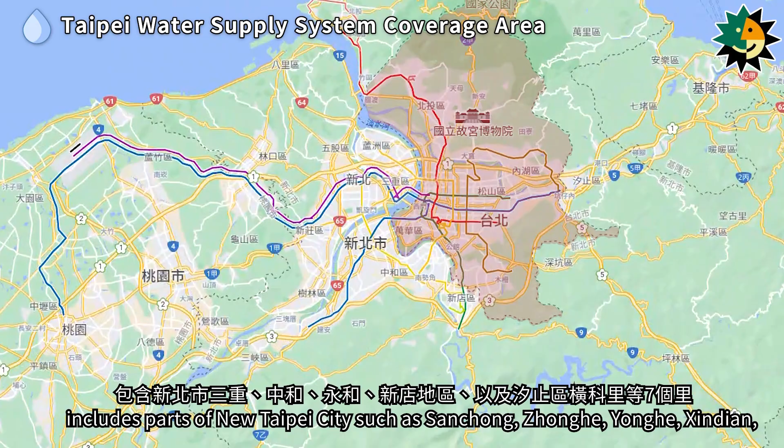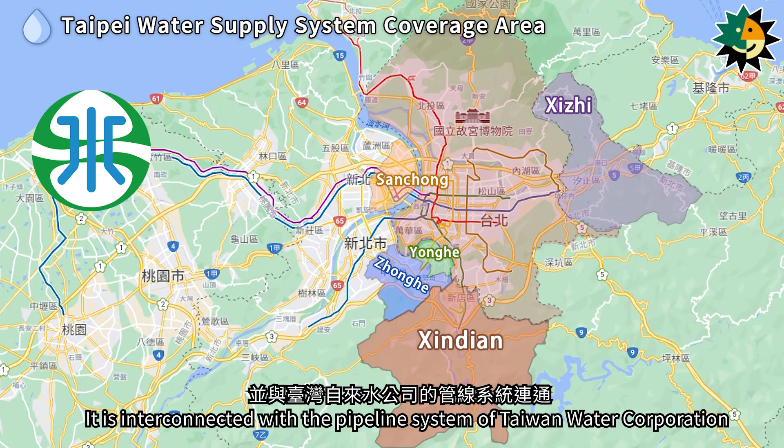The Taipei water supply system, centered around Taipei City, includes parts of New Taipei City such as Sanchong, Zhonghe, Yonghe, Xindian, as well as Hengke Village in Xizhi District and 7 other villages. It is interconnected with the pipeline system of Taiwan Water Corporation and regularly supports areas like Banqiao, Luzhou, Xinzhuang, Tamsui, Sanzhi, Xizhi, and Shenkeng in New Taipei City.

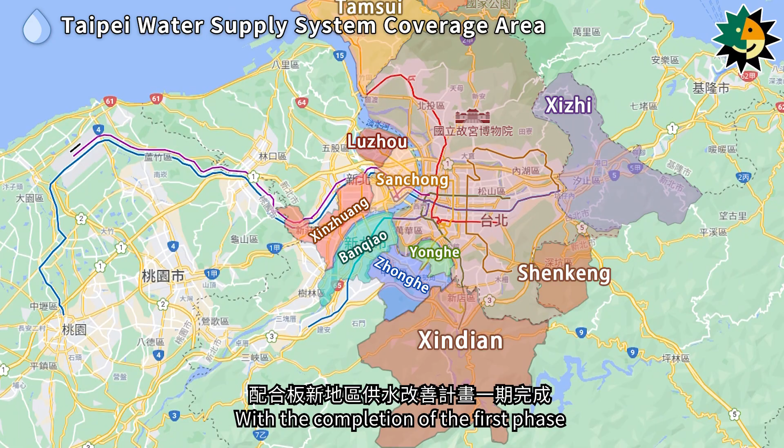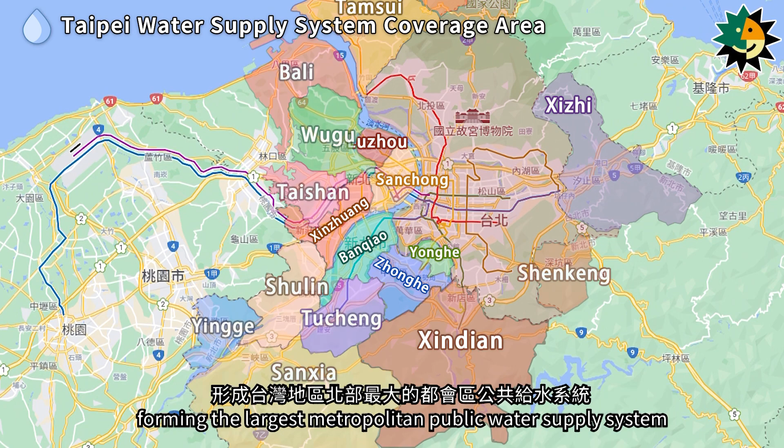With the completion of the first phase of the Banxin Area Water Supply Improvement Project, it further supports Bali, Wugu, Taishan, and parts of Tucheng. The second phase will expand support to Shulin, Yingge, Sanxia, and Tucheng in the Banxin area, forming the largest metropolitan public water supply system in northern Taiwan. The water distribution network spans over 3,000 kilometers.

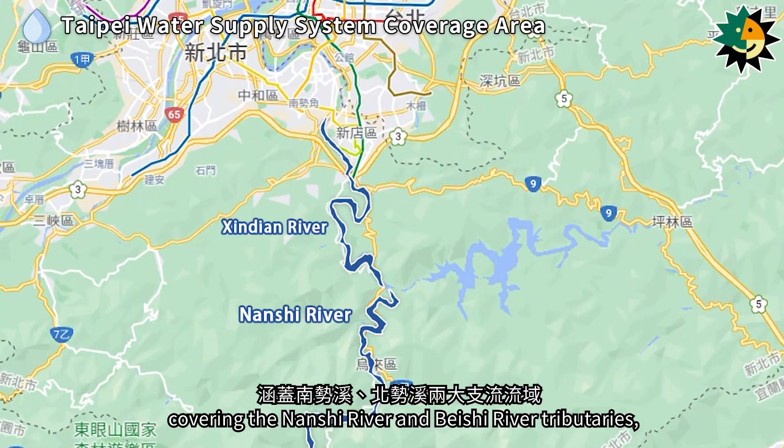The Xindian River is the main headwater for the Taipei metropolitan area, covering the Nanshi River and Beishi River tributaries, with catchment areas in Shiding, Xindian, Pinglin, Wulai, and Shuangxi, providing over 97% of the water for the Taipei metropolitan area.

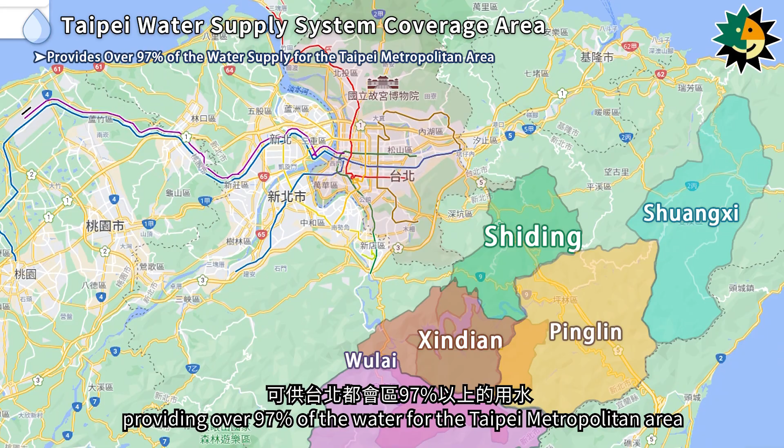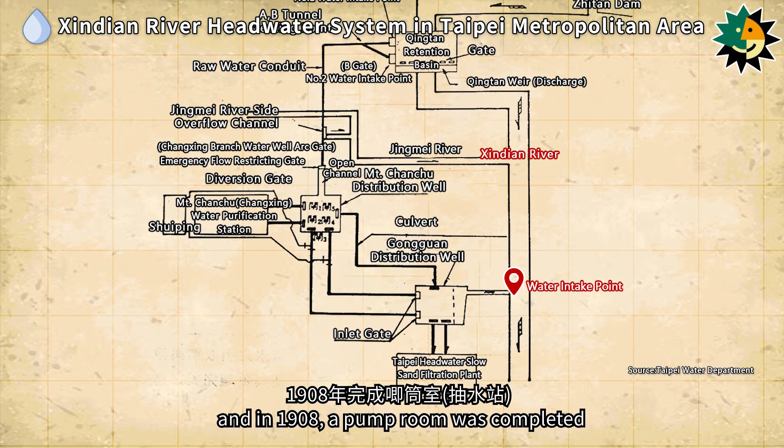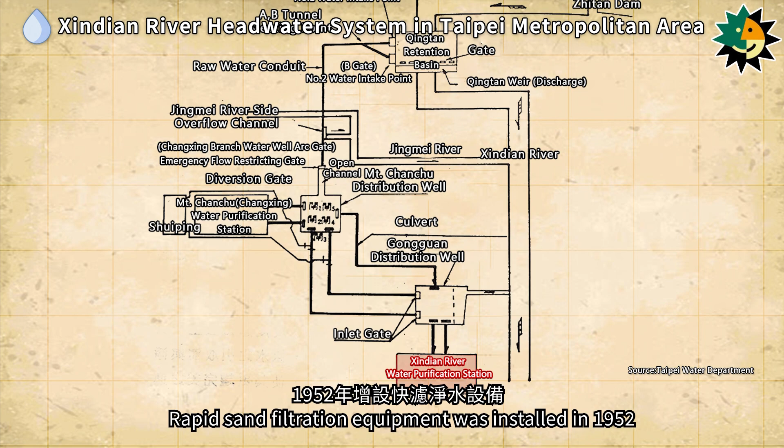In 1907, a water intake point was established at the lower reaches of the Xindian River, and in 1908, a pump room was completed to supply the Taipei Headwater slow sand filtration plant. In 1946, a second intake point near the original Xindian River intake point was established, and 2 additional pumps were added in 1949. Rapid sand filtration equipment was installed in 1952. Water from both intake points at the Xindian River is directed to the Gongguan Water Distribution Well.

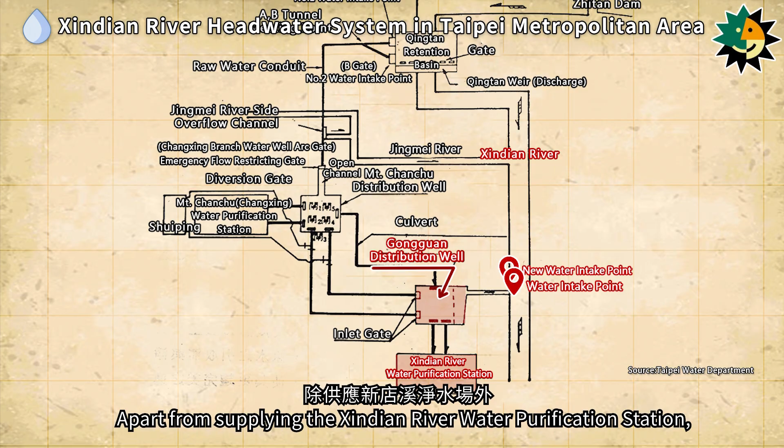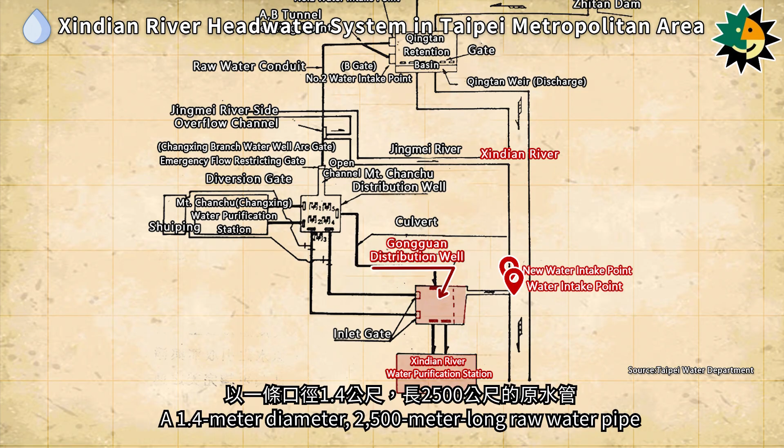Apart from supplying the Xindian River Water Purification Station, it also supports the first phase of the Taipei Water Supply Expansion Plan, which began in 1962 and was completed in 1965. A 1.4-meter diameter, 2,500-meter long raw water pipe was constructed to deliver water to the Chanchu Mountain Water Distribution Well, providing water to the newly established Chanchu Mountain Water Purification Station to meet the planned water supply for 1.18 million people in 1965.

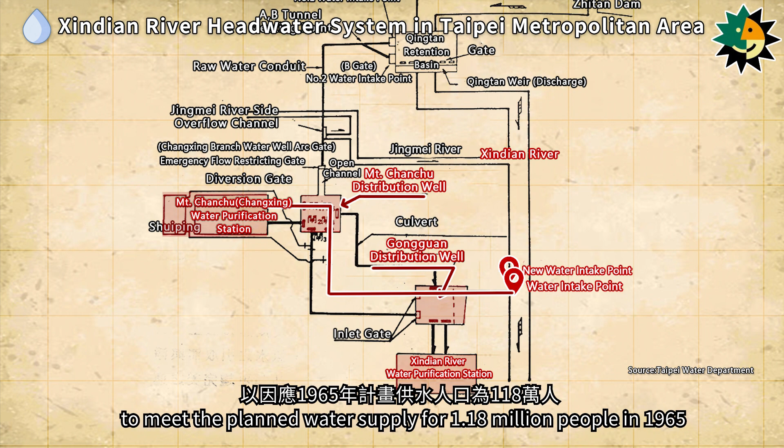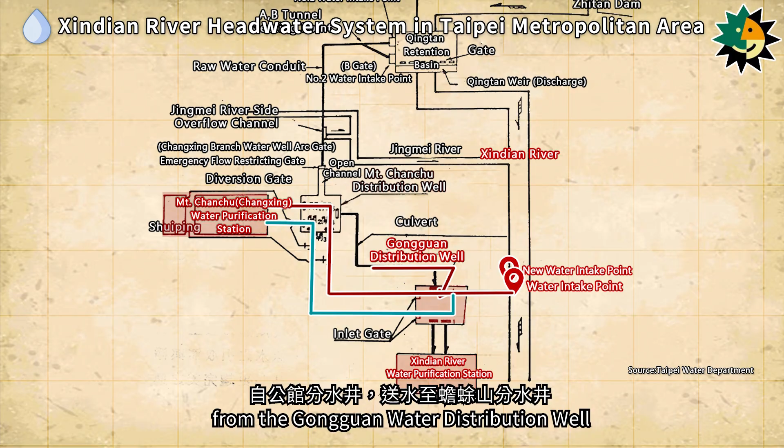In 1971, to support the second phase of the Taipei Water Supply Expansion Plan, another 1.4-meter diameter raw water supply channel was added from the Gongguan Water Distribution Well to the Chanchu Mountain Water Distribution Well, increasing the headwater for the Chanchu Mountain Water Purification Station.

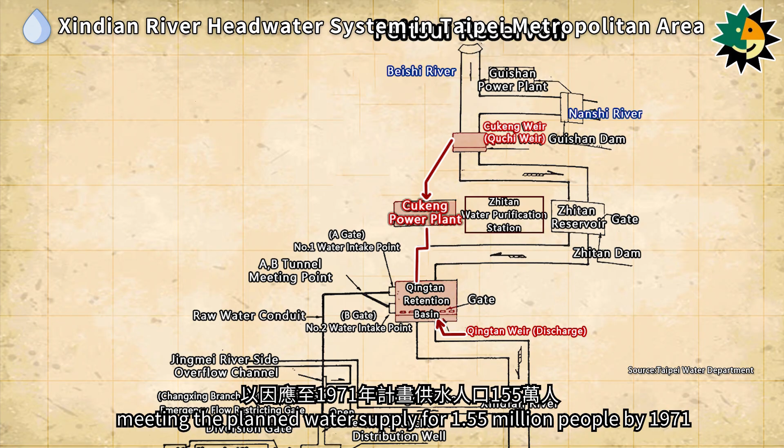Additionally, in 1965, Taiwan Power Company added 2 vertical rising sluice gates at the Quchi weir to divert water for the Cukeng hydropower plant. The tailwater from peak power generation was also used to supply the Qingtan Weir for the water purification station, meeting the planned water supply for 1.55 million people by 1971.

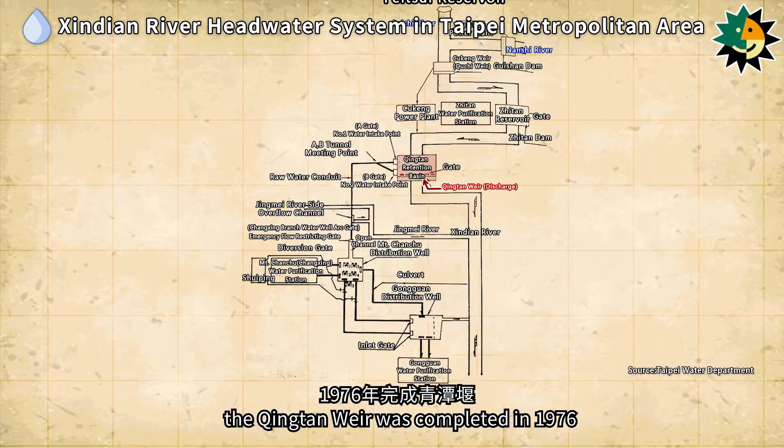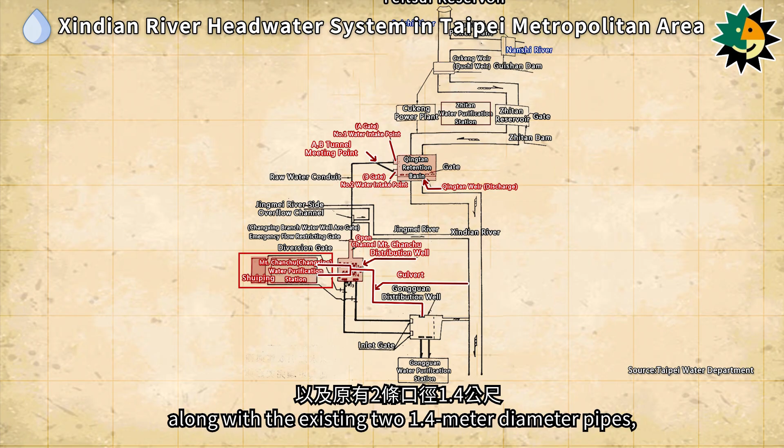In coordination with the third phase of the Taipei Water Supply Expansion Plan, the Qingtan Weir was completed in 1976. It features 2 water intake points and utilizes a 3.2-meter diameter tunnel and open channel, stretching 8.9 kilometers, to channel water into the Chanchu Mountain Water Distribution Well, supplying the Changxing Water Purification Station. Additionally, a new 2-meter diameter culvert and tunnel, 2.07 kilometers long, were added, along with the existing 2 1.4-meter diameter pipes, to transport water to the Gongguan Water Distribution Well, serving the newly constructed Gongguan Water Purification Station.

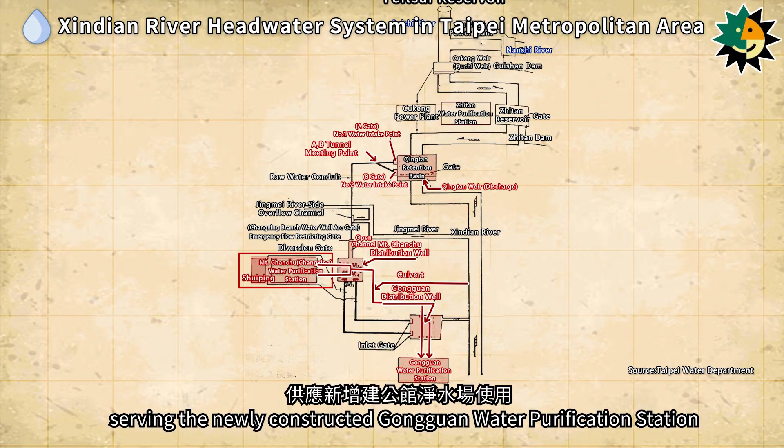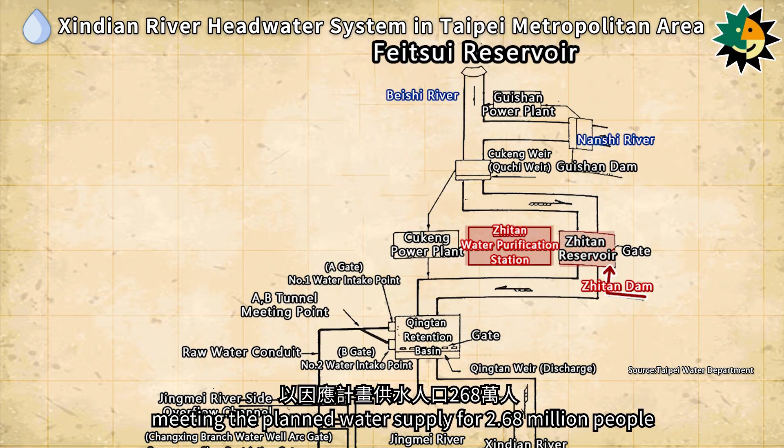In 1978, the Zhitan Dam was completed to supply raw water to the Zhitan Water Purification Station, meeting the planned water supply for 2.68 million people. In coordination with the first stage of the fourth phase of the Taipei Water Supply Expansion Plan, the third water purification facility at the Changxing Water Purification Station was built in 1972.

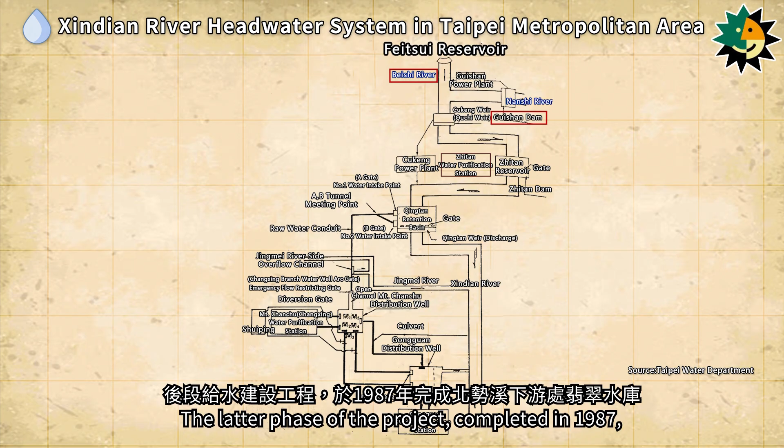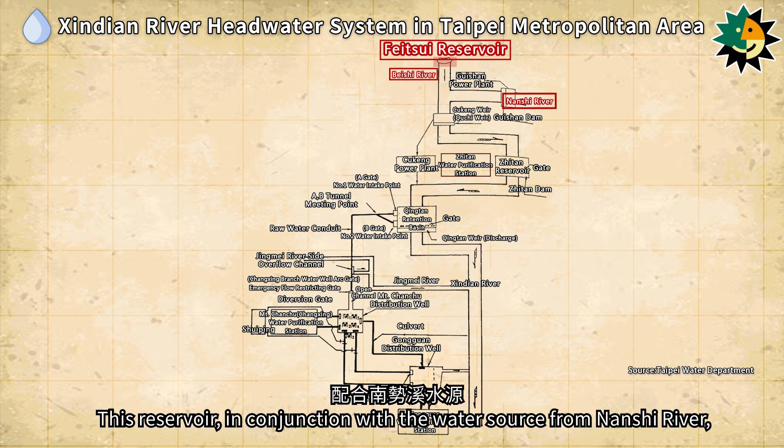The latter phase of the project, completed in 1987, saw the construction of the Feitsui Reservoir downstream of Beishi River. This reservoir, in conjunction with the water source from Nanshi River, was utilized to regulate and supply water to the Gongguan, Changxing, and Zhitan water purification stations.

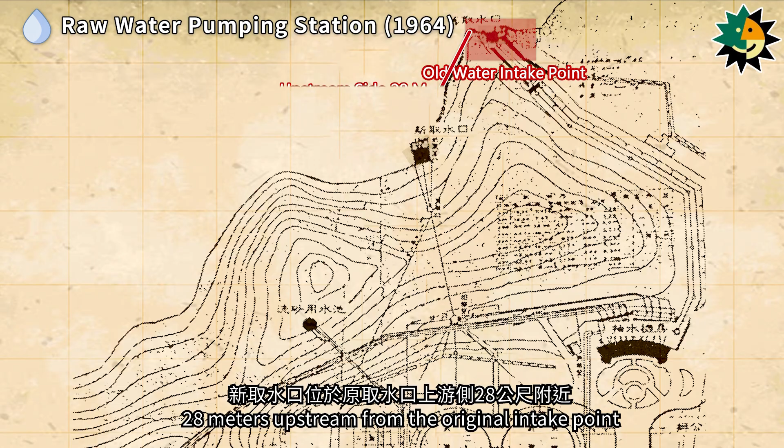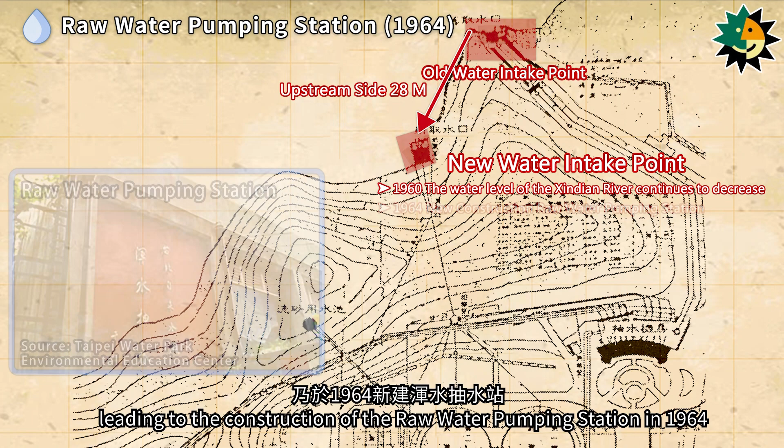Due to the decreasing water level of the Xindian River, a new water intake point was established in 1946, 28 meters upstream from the original intake point at the lower reaches of the river. By the early 1960s, this new water intake point became less effective as the river level continued to drop, leading to the construction of the raw water pumping station in 1964. Additional water pumps were gradually added to meet the water supply needs.

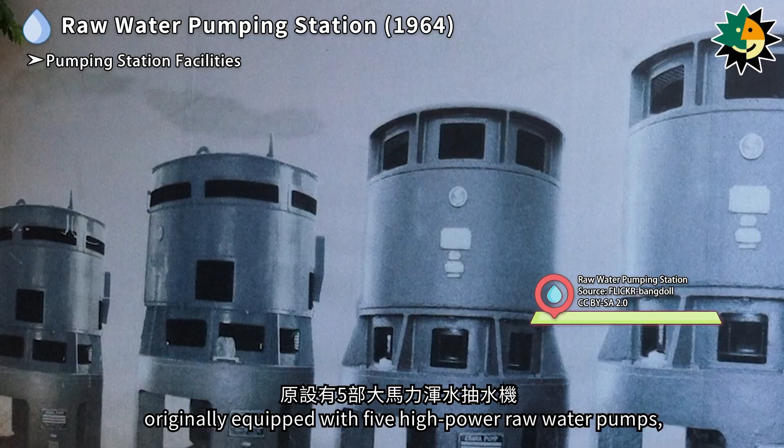The raw water pumping station is constructed of reinforced concrete, with a caisson foundation infrastructure design. The building is divided into 2 levels. The upper level houses the pump room, originally equipped with 5 high-power raw water pumps, and later 11 smaller horsepower motors were added. The lower level is the water pipe room, with a side room for the electrical distribution control panel room. After its retirement in 1976, the station was listed as a historic building and is currently being renovated to become a riverside scenic restaurant.

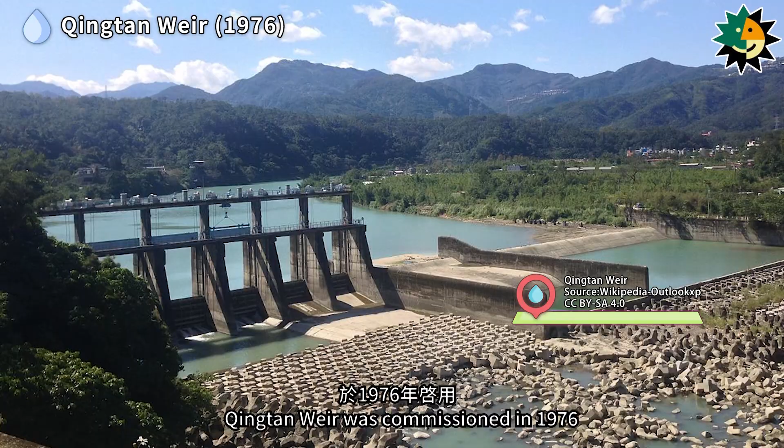Located on the Xindian River at Xiaochukeng, upstream of the Chuking Power Plant and downstream of the Bitan Scenic Area, Qingtan Weir was commissioned in 1976. It is a gate-controlled floating concrete weir. The gate section of the weir is 69.6 meters long, divided into 6 openings by 6 1.6-meter thick bridge piers, each opening being 10 meters wide. The non-gate section is 128 meters long, making the total length of the weir 197.6 meters.

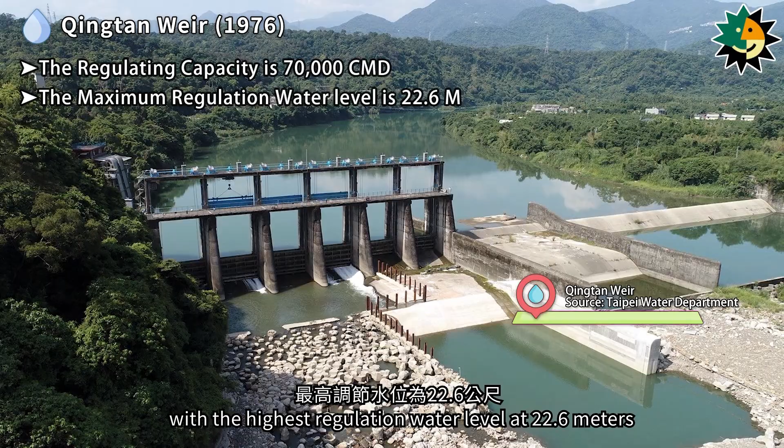It has an effective regulation capacity of 70,000 cubic meters, with the highest regulation water level at 22.6 meters. The Qingtan Weir is equipped with a water intake point, with a daily capacity of 1.08 million cubic meters, and a raw water diversion pipe that is 11,119 meters long.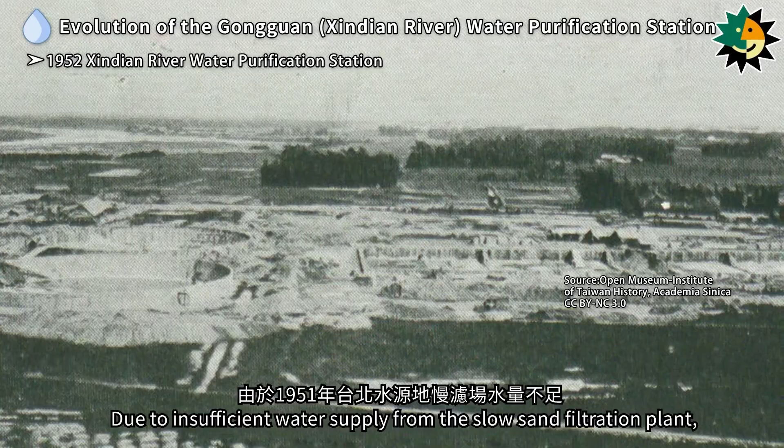The Taipei Headwater Point Slow Sand Filtration Plant was completed in 1909. Due to insufficient water supply from the slow sand filtration plant, a rapid sand filtration plant was constructed adjacent to it in 1951 and completed in 1952. It was renamed the Xindian River Water Purification Station.

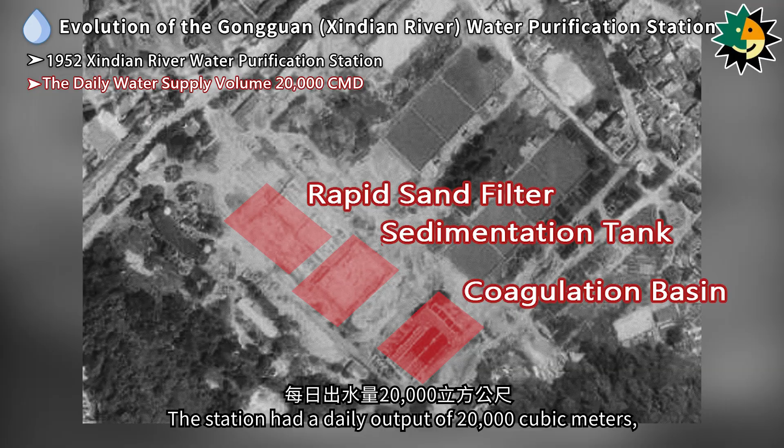A new water intake point was also established near the original intake point at the lower reaches of the Xindian River, with water being directed to the purification station through a pump room. The added facilities included 1 coagulation basin, 2 sedimentation tanks, and 4 rapid sand filters. The station had a daily output of 20,000 cubic meters, supplying domestic water to the Taipei City Walls area.

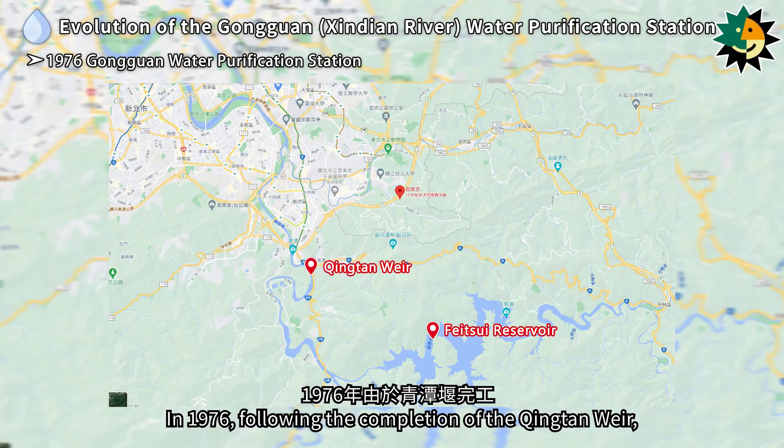In 1974, the slow sand filtration plant was decommissioned and demolished, and the site was rebuilt as the Gongguan Water Purification Station, which utilizes rapid sand filtration for water purification. In 1976, following the completion of the Qingtan Weir, the Gongguan Water Purification Station added a rapid sand filtration facility with a daily distribution capacity of 480,000 cubic meters.

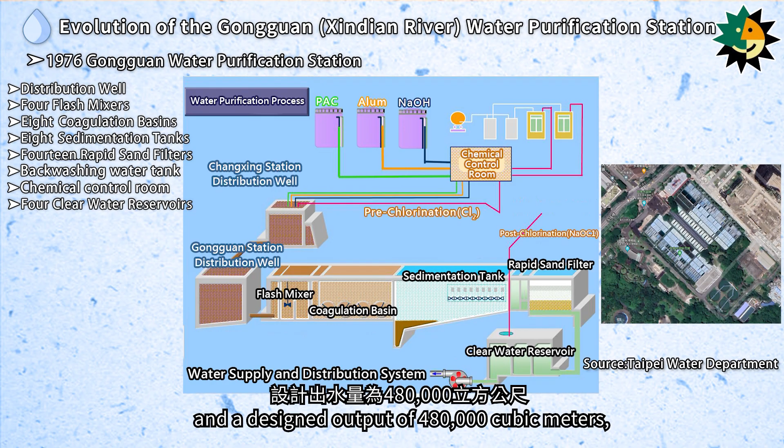The Gongguan Water Purification Station's facilities include a distribution well, 4 flash mixers, 8 coagulation basins, 8 sedimentation tanks, 14 rapid sand filters, a backwashing water tank, a chemical control room, and 4 clear water reservoirs. The station has a daily raw water purification capacity of 520,000 cubic meters and a designed output of 480,000 cubic meters, supplying domestic water to Zhongzheng, Wanhua, and Wenshan districts of Taipei City.

By 1958, Taipei's population had exceeded 800,000, and the water supply was only about half of the normal demand. Considering the limited water quantity and distribution distance of the water supply system, the Water Supply Construction Committee was established to plan long-term water supply projects. The first step was to plan a new Chanchu Mountain Water Purification Station at Changxing Street at the foot of Chanchu Mountain.

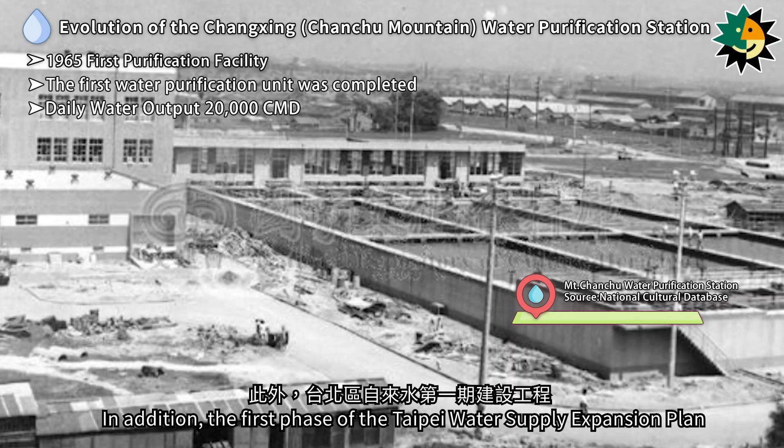In addition, the first phase of the Taipei Water Supply Expansion Plan includes the construction of 3 deep wells, 3 large elevated distribution reservoirs, and the installation of over 300 kilometers of new water supply and distribution pipelines, extending the supply area to include Sanchong, Shilin, Yonghe, Zhonghe, Jingmei, Xindian, and Muza.

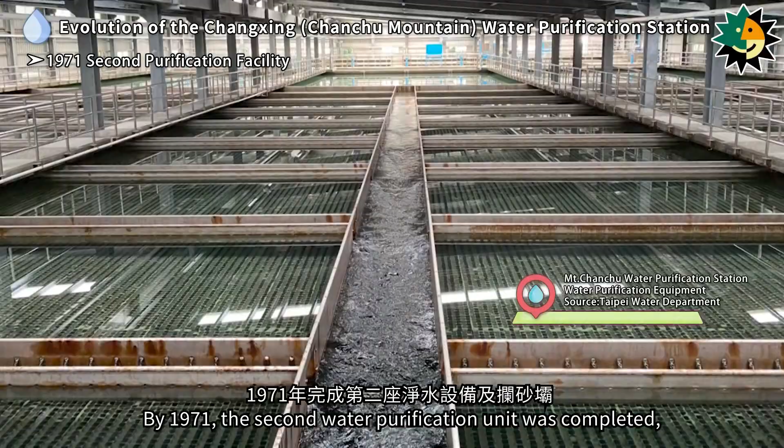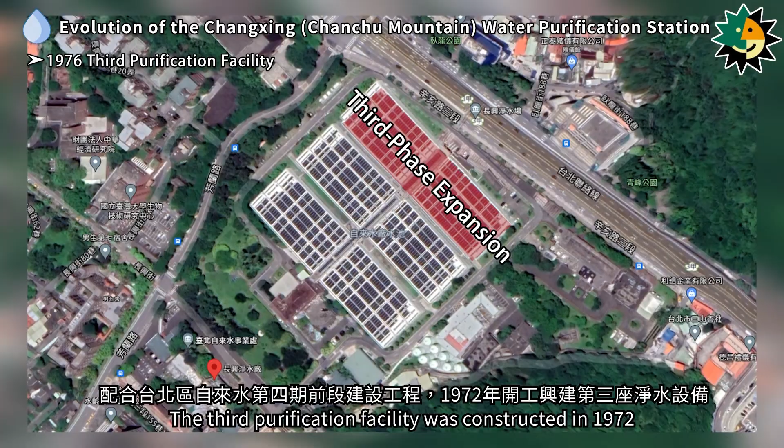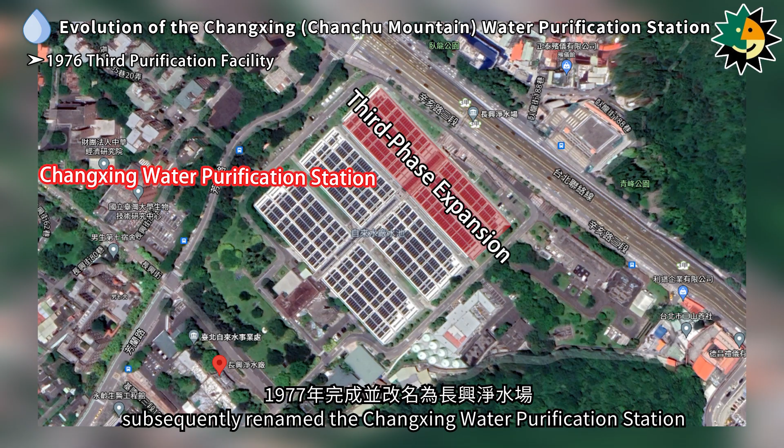The third purification facility was constructed in 1972 as part of the first stage of the fourth phase of the Taipei Water Supply Expansion Plan and was completed in 1977, subsequently renamed the Changxing Water Purification Station. The facility includes 6 coagulation basins, 18 sedimentation tanks, 9 rapid sand filters for clear water reservoirs, and 2 flash mixers.

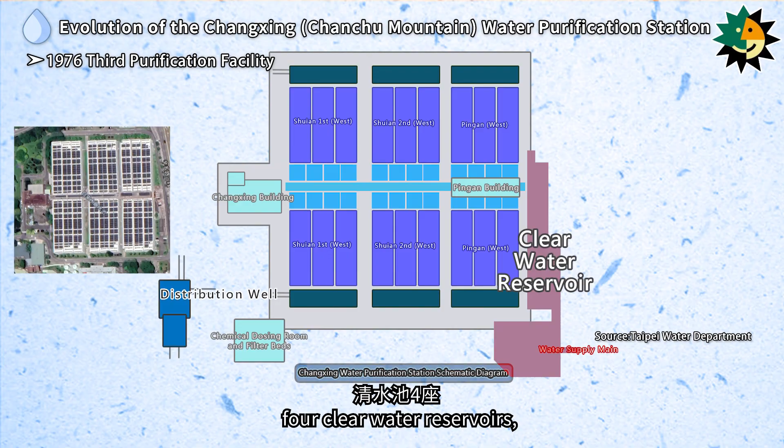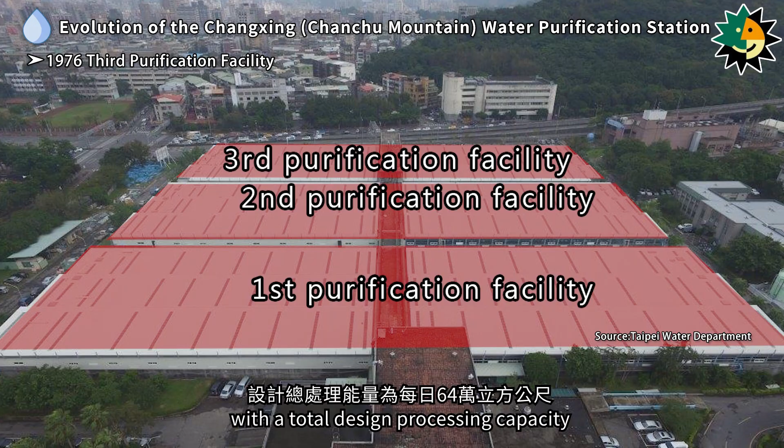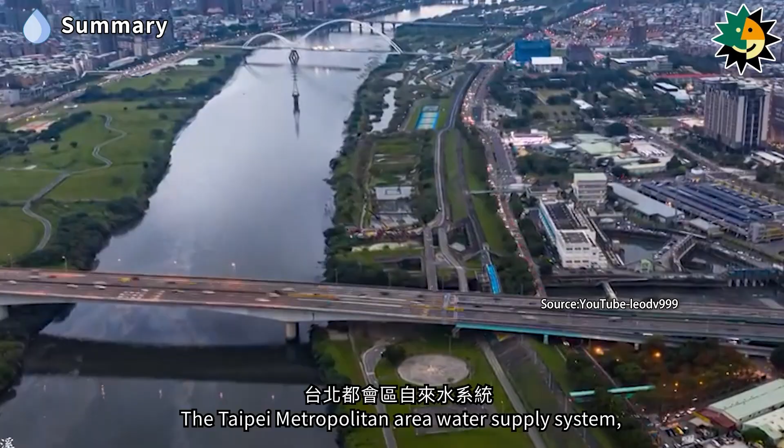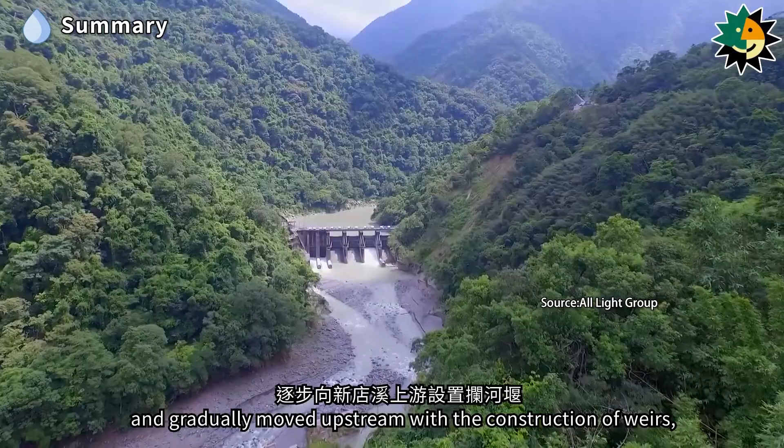The Taipei Metropolitan Area Water Supply System, which started over 100 years ago serving 120,000 people, has developed to the point where it now supplies water to 6 million people in the Taipei metropolitan area. Over time, to ensure a sufficient and clean water supply, water intake points were initially set up in the lower reaches of the Xindian River and gradually moved upstream with the construction of weirs, leading to the building of the Feitsui Reservoir to regulate the water supply for the water purification stations.

The main water purification stations in the Taipei metropolitan area currently are the Changxing Water Purification Station, Gongguan Water Purification Station, and Zhitan Water Purification Station. The previous episode introduced the water purification stations from the Japanese colonial period. This episode covers the Qingtan Weir, Gongguan Water Purification Station, and Changxing Water Purification Station, and the next episode will introduce the Feitsui Reservoir, Zhitan Weir, and Zhitan Water Purification Station.

The Zhitan Water Purification Station currently supplies 70% of the water for the Taipei metropolitan area, and the Feitsui Reservoir is an important water resource development to ensure a stable water supply for the Taipei metropolitan area until 2030. It needs to be properly maintained, and its resources should be cherished and utilized effectively.